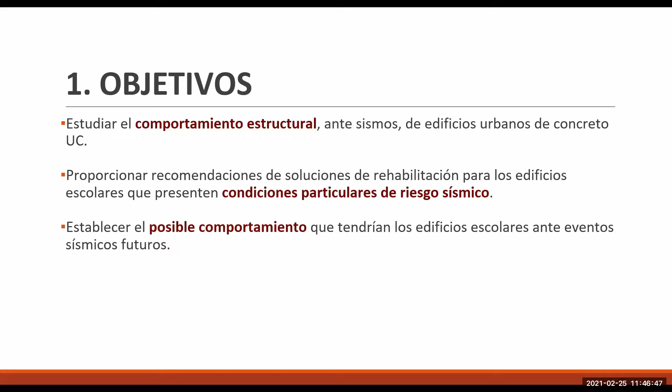to INIFED. And the second recommendation has to do with recommendations for school buildings with particular seismic risk conditions. The third one is to establish possible behavior of school buildings in seismic events in the future. This shows concepts of our research project.

This is the design and how structures are displaced. Sometimes they are displaced over the elastic limit, as you can see, and this results in considerable damage. And we have the different designs here for earthquakes that may take place throughout the useful life of the structure.

So this damage may lead to interruption of the occupation of the building. And this has to do with the anti-collapse. And this has to do with considerable damage affecting the behavior of the building and its operations. Looking at these concepts in an extrapolation, we see

that these structures complied with basic performance principles, and this is operational performance, and we have a collapse prevention performance behavior. What happens to essential structures in those schools? Aside from the performance level, we have to protect lives. And we should not be compromising those structures, and this has to do with their original structure.

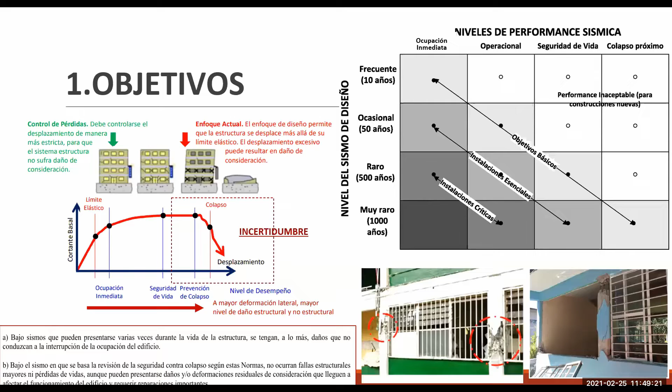However, experiences show that there is an important percentage of schools with a behavior which is very far from the safety level. And this has to do with the fact that there's a zone of uncertainty where we cannot control the mechanism of structural elements. That's why we should highlight improving those performance levels so that the structures have fast recovery to do away with economic and human losses, because these buildings work as shelters sometimes in natural disasters.

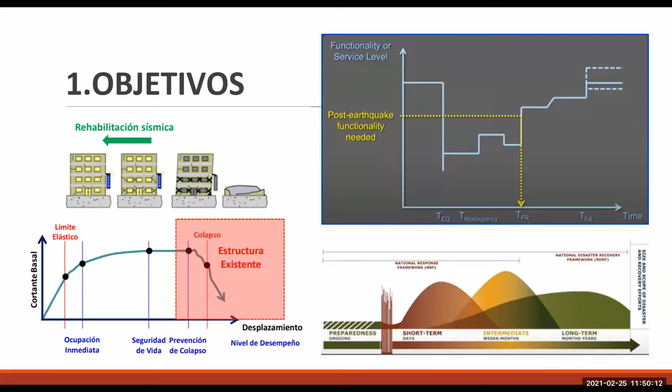The existing structures, this is the retrofitting process to improve performance level. In 2019, a conceptual framework was proposed for the retrofitting of structures based on their functional performance, based on recovery percentages for each one of the phases, short, medium, long term. This timeline will be defined according to the type of structure. In our case, we're talking about school buildings and the economic, social, political conditions of the country.

These are the buildings we studied: urban concrete buildings, 1 to 3 story buildings, 1982, 1988, 2011. These are elongated buildings parallel to the corridor of the building, and there's 3.20 meters. This is the distance. And there's also a distance of 8 meters. And 1 story, 3.20 meters average, 2 stories, 6.40, and 3-story, 9.40 meters.

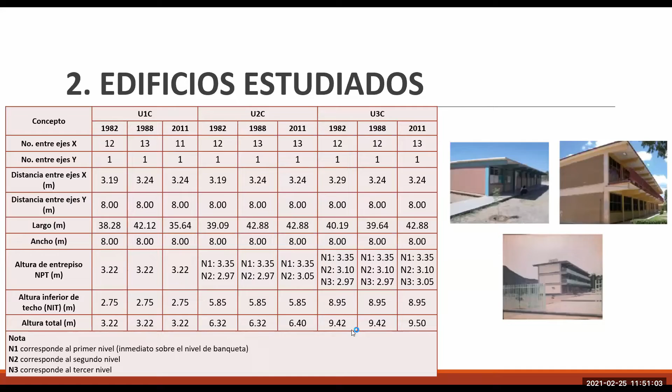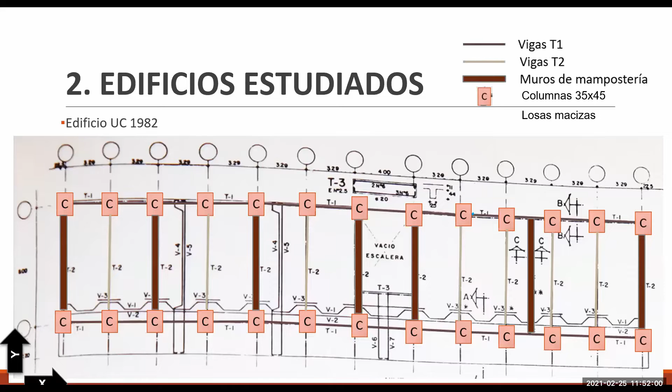And this is the structural inspection, and this is the way we have the interconnected columns through concrete beams and slabs of different thickness. Generally, 1982, you can see the transversal short direction, and this is the long direction right here. These walls, derived from inspections, we found the walls were in contact with the frame in terms of their placement under the windows with the short columns.

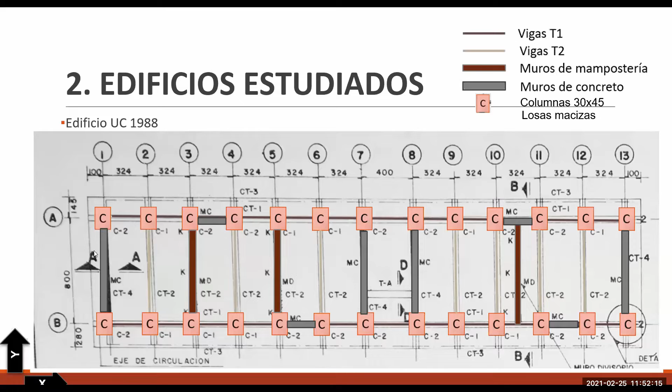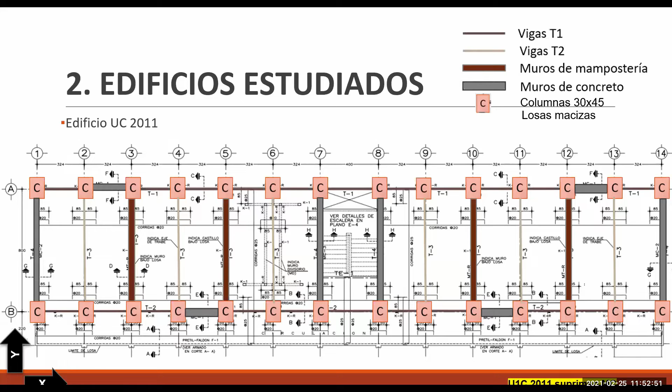This is 1988, similar behavior. However, concrete walls were added in the longitudinal and transversal directions. Likewise, in 2011 prototypes, we see concrete walls, but with a better and more symmetric distribution vis-a-vis the shortest direction. And for this one level building, the section of the column was increased and the concrete walls. Later, we will see the implications of this consideration.

Material properties. According to complementary techniques, you see here characteristics of concrete. This has to do with the dynamic properties of the structure. 1982 prototypes and the strength. You can see everything on the screen. And this is 1988, 2011 concrete, 250 kilograms per square centimeter. And this is what was used and the elasticity.

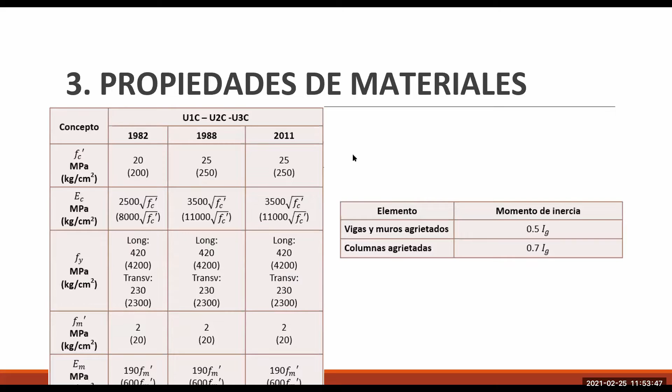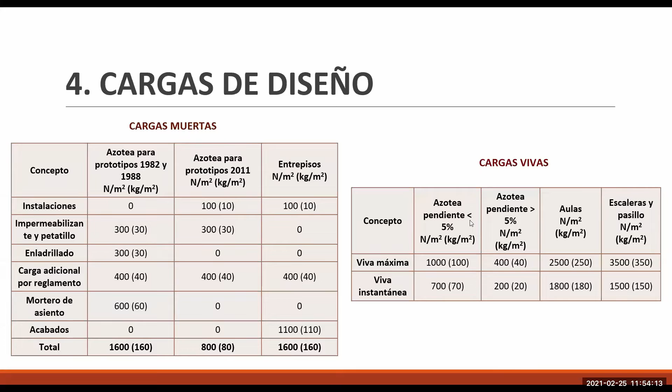We also consider this according to complementary techniques that have such an important influence on the calculation of final properties. We defined these elements according to complementary technical norms and standards. For the oldest prototypes, 1982, 1988, additional loads were considered in these prototypes in actual constructions. Seismic demands.

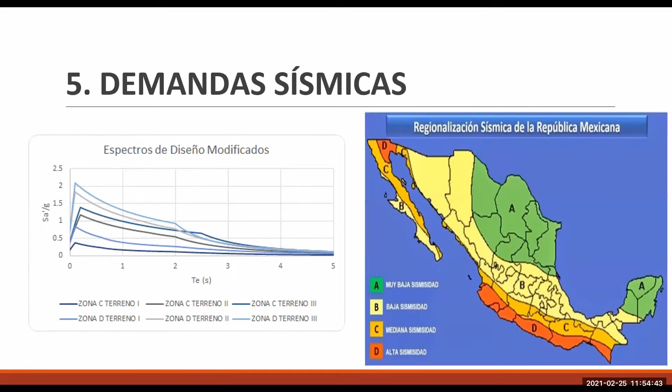According to INIFED norms, R079, this was calculated for 5%, and this is for zone C, ground 1, and zone D, ground 2, according to the evaluation of those conditions.

Seismic demands. According to complementary technical standards for Mexico City, 4 points in the city were inspected, and close to them, there was information of the schools with different damage levels after the 2017 earthquake.

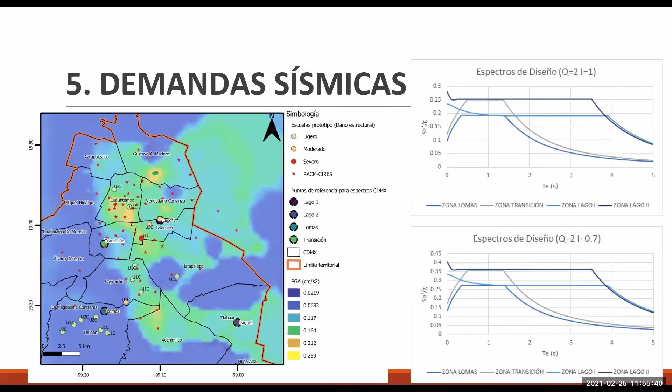This has to do with a percentage of 5% behavior, seismic behavior as well, and the assessment of regularity conditions for longitudinal direction. Irregularity pattern 1 and the transversal one 0.7.

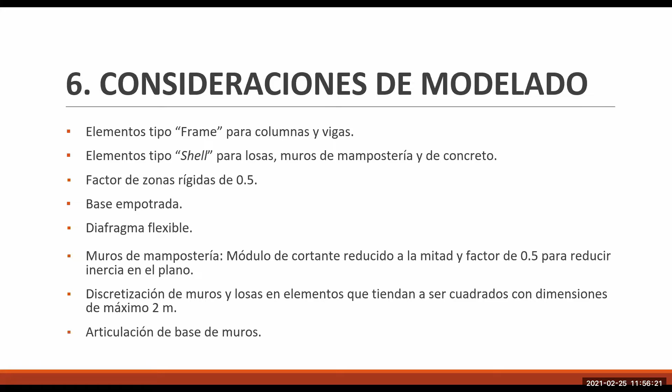Some modeling considerations. Frame type elements for columns and beams, shell type elements for slabs, walls, masonry, and concrete, and rigid or stiff zone factors of 0.5, and flexible diaphragm and masonry walls as well. And we calculated the slab elements as well.

This is the result of the modal analysis. This is the longitudinal direction. Here you see the different demands, and you can see the fundamental period right here. And this is the direction for the 1982 one. This was the reduction in this case of almost 0.1.

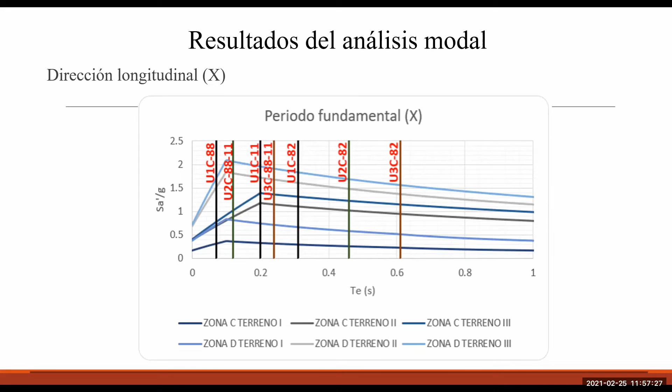So the elimination of these walls in the prototype of 2011, this is something that was done until the flexibilization process took place. Here we see that in the cases of the 1982 prototypes that are older, we can see the fundamental situation. And Santiago will now take the floor.

Thank you. Let us continue with results. Here we see linear analysis as of distortions between stories or floors. This is prototype U1C, and you can see exactly what these distortions are, and this is in Mexico City.

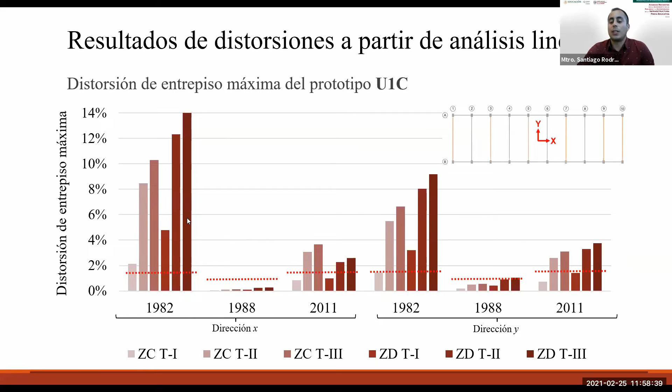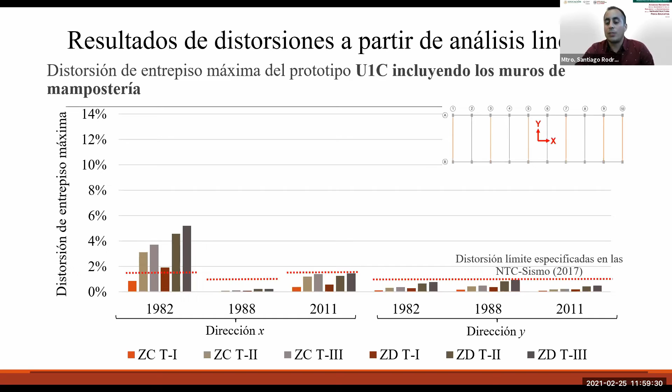In practice, there are prototypes built with walls attached to the structure. And we had minor distortions in this case, 1982, 2011, because those prototypes did not have walls. So in terms of the masonry, we're able to have lower levels, lower than 1%. But you can see here distortions under windows and short columns, but the limit levels are not met.

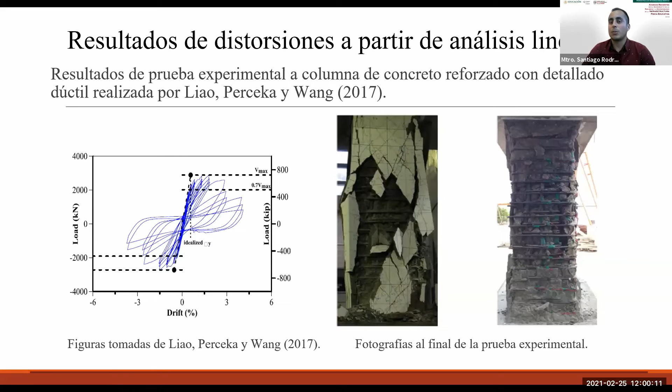Here you see those values that do not indicate those distortions will be reached, but they will collapse. You can see this, which is not over 6%, and these are experimental results in a reinforced concrete column. You can see the reduction, 3%, 4%. Here you can see it on your screen, we had distortions of over 10%.

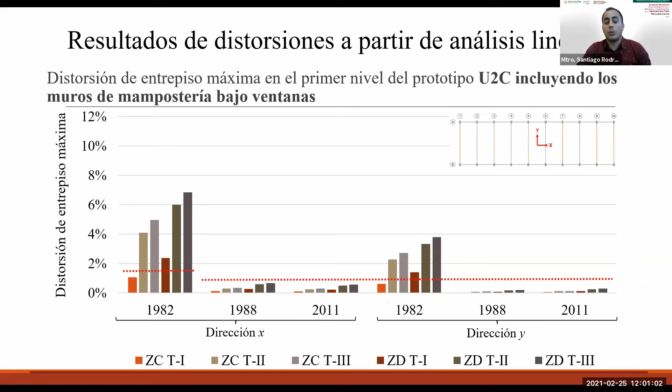The case of U2C prototypes, distortions are excessive once more. And we can see 1988, 2011, less than 1% distortions. And you can see here no important changes, since this has to do with concrete walls in both directions. And we have data from 1982, with the exception of zone C, which is ground type 1.

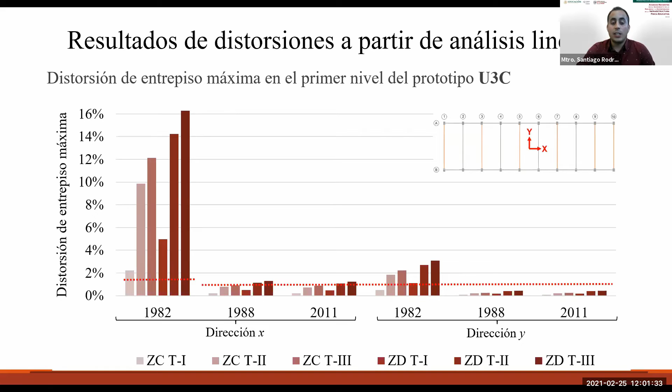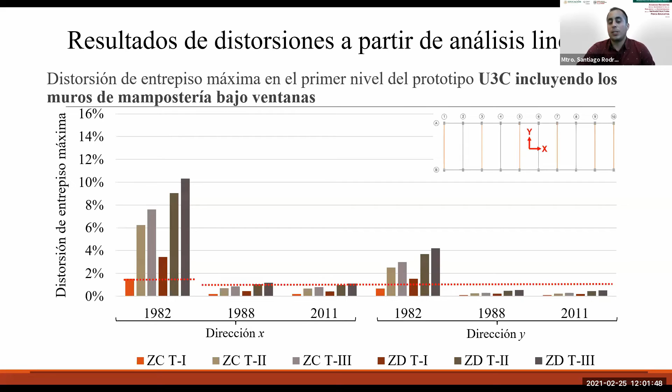Here you see the three-story buildings. These are 1982 prototypes. You can see the difference between 1982 and 1988, and you have the X direction. We have to do better analysis of this because we've had changes and we see slight changes. These are the masonry under windows. This is masonry walls under windows.

In 2011 type C, prototype 1, we can see when the elasticity is reduced, when it goes from one factor to another, we see an increase of 68% in distortion.

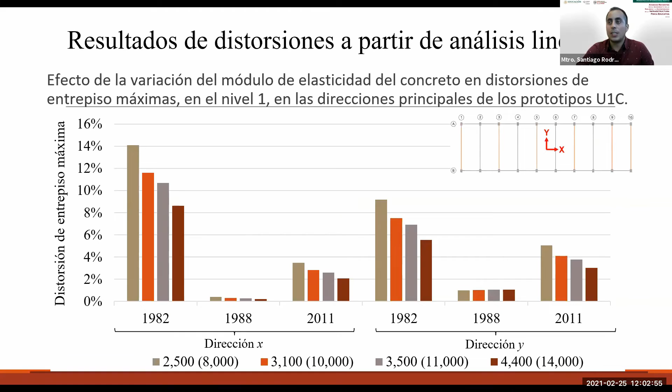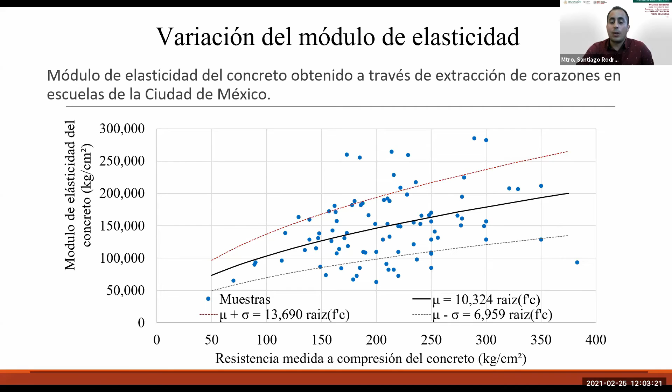That's why here you see results of elasticity module of concrete obtained through the extraction in different schools in Mexico City. And this has to do with class 1 concrete. Therein lies the importance of assuring material quality. As you see, this may affect directly all constructions.

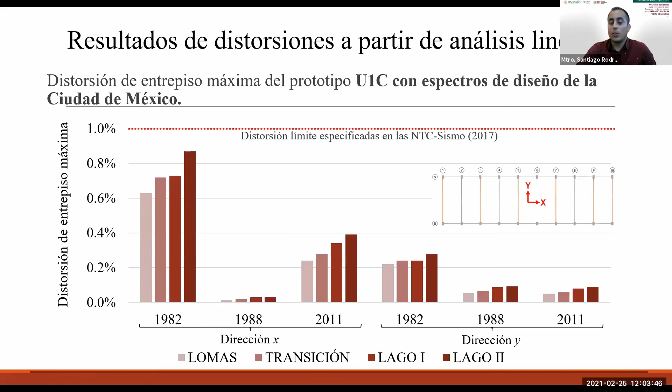These are results with linear analysis, and you see the distortions here. This is in Mexico City, U1C prototype. And for U1C prototypes, you can see what happened with these designs in Mexico City. Once more, they all comply. And U3C prototype, with the exception of 1982 with X direction.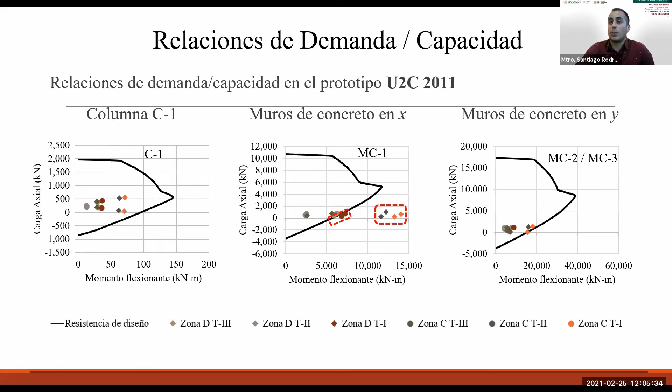This is the longitudinal X direction for different grounds. Now, this is the demand capacity relation. We see the masonry walls excessively demanded in terms of their capacity, and then we have the concrete walls to compare that. These are the U2C prototype 2011. The concrete walls do not comply with specifications for longitudinal direction.

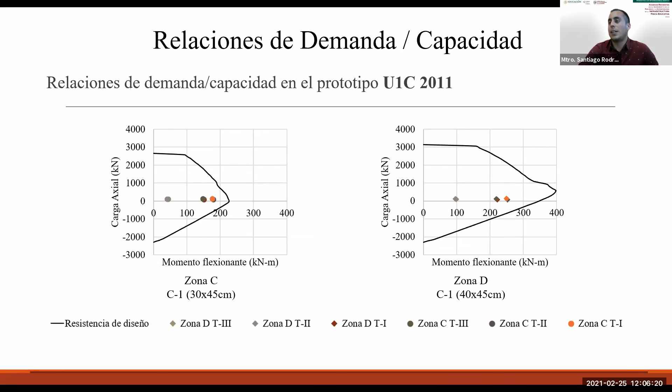And the important thing here is that we have the masonry walls here. And normally the concrete walls, I'm talking about the longitudinal ones. For the case of U1C 2011, we have two different types of columns. When we went from the 1988 design, we can see the width of the column here. These are the changes that we found, and it does comply with the demand capacity relationship. But in the masonry walls, demands are excessively big.

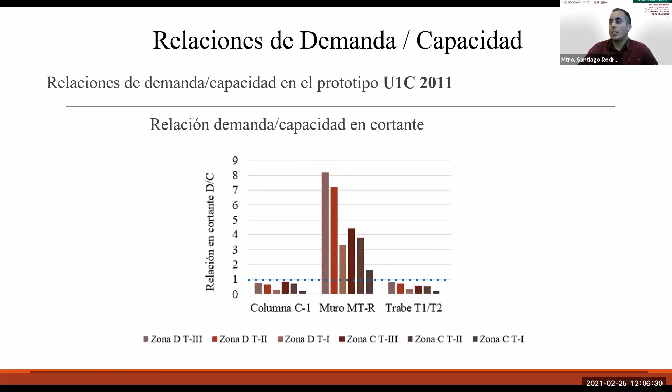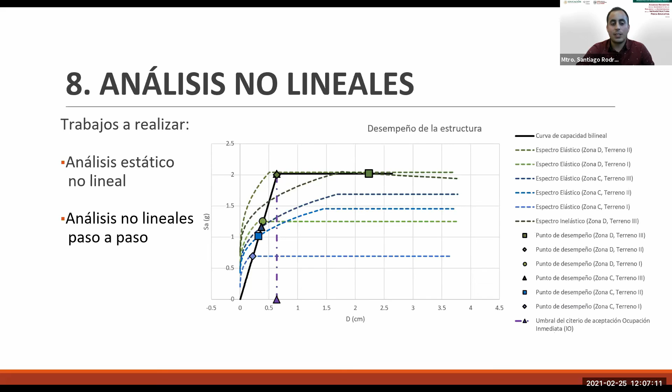Finally, as part of the work we still have to do, it's nonlinear static analysis with performance points and nonlinear step-by-step analysis to look at the results of the nonlinear static analysis to confirm priority attention levels and determine optimal retrofitting process in each case. Here you see the example of a nonlinear static analysis, the different points of this analysis, conclusions based on results obtained in seismic area C and D of Mexico.

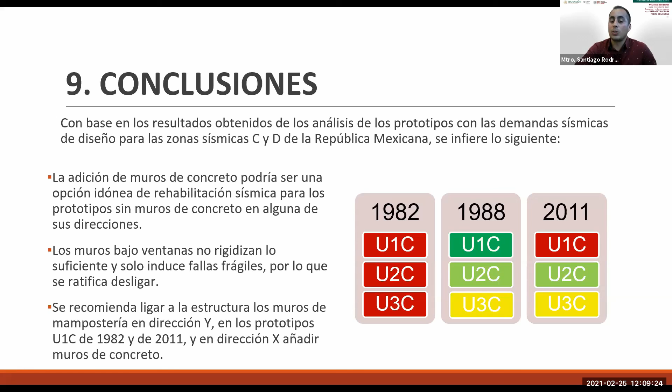And finally, the different prototypes of U1C 1982 and 2011 have no wall resistance, so they are between red and yellow. And it is recommended to do this in terms of the masonry walls and the different prototypes of 1982 through 2011, because those walls were eliminated. And in the case of the 1988 prototype, it behaved appropriately in X direction.

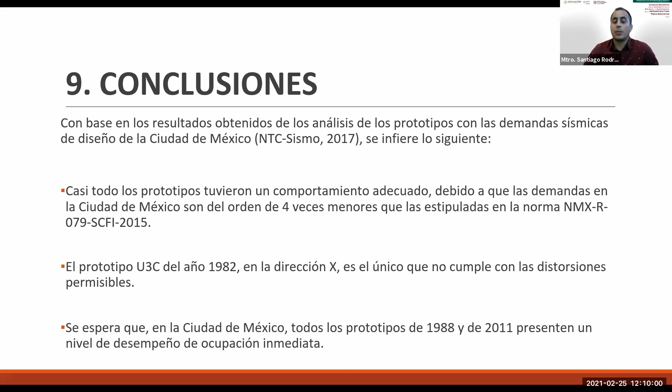Based on results of the prototype analysis in Mexico City, most of the prototypes had appropriate behavior because demands in Mexico City are in the order of 4 times less than those in NMX-R-079-SCFI-2015. So prototype U3C of 1982 direction X is the only one that does not comply, and it is expected this is going to be changed, and these are things we're going to have to look into in detail in Mexico City.